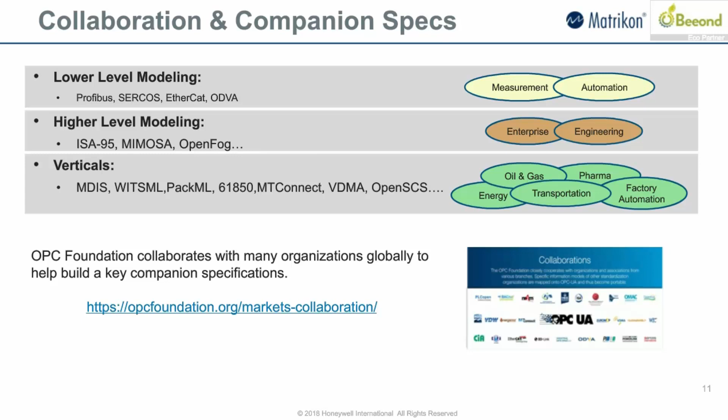Now, that's all I'm going to say about these companion specifications, which, again, now you know are basically various information models that would be accepted or used by various organizations that have a common requirement or need to use them for. So that's sort of the overview of how information modeling ties in.

Now let's go and take a look at the actual information modeling itself, how to visualize and how to understand what information modeling is about. So the easiest way to do this, I thought, would be to just take a look at a physical asset. So let's say you've got a robot and it's got various points. I just added some, those crosshairs are little data points that you might be looking at on the robot, say a welding robot. So this is what you would have as a physical asset.

Now in today's lingo, especially if you're dealing with Industry 4.0, but also in the Industrial Internet of Things, we talk about cyber-physical systems, right? So that basically means that you've got a physical asset that is properly modeled and represented in cyberspace, because in the end, it's the interaction of the various information models in cyberspace, or on the digital side of things, where their data and the services that they provide, all those interactions happen there, and the physical assets then execute on that.

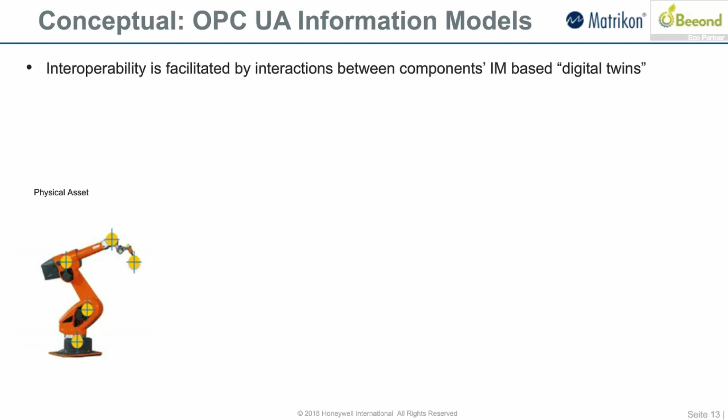So in that sense, we would call the information model and all the information associated with that information model for a given physical asset, when you bring those together, so the data relationships, the services that act on them, and all the data, I show them in two different boxes above and below. If you bring all those together, that's really what you would call the digital twin, right? So just for ease of reference, that's what I'm talking about when I refer to something as a digital twin. It's the cyber representation of the capabilities and states of a particular system.

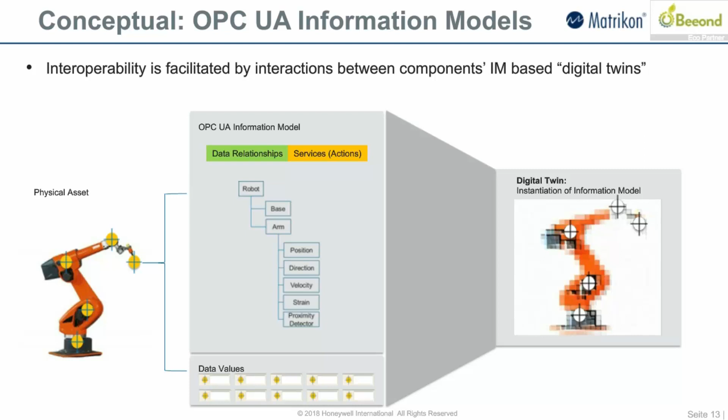So now when we shift over to how implementation of this would work, what we find is that, number one, you've got this robot, and of course it's got processors and all sorts of subsystems within it to operate all the components and keep diagnostics running and such. So you are going to have a model and a relationship between the various components, and those include some actions that it can perform that could be exposed, and also the actual readouts, either read or write points on it.

So basically, if you're creating an OPC UA server, which sits at the heart of this interface, what makes a digital twin accessible or visible to the outside world would be through an OPC UA server. So in this case, Matrikon provides an OPC UA SDK for building the OPC UA servers and clients. So what you would do is you would code both the interaction with the data, the reads and writes, interfacing with the physical system, and the information model, and you would implement that via the Flex into an OPC UA server.

So this now creates your gateway or entry into this cyber-physical world. That's how the world interacts with your physical asset, through this OPC UA server. However, given the complexity and how much you have to work with the models, there's a lot that has to get done there, because the more components you have and the more services that are exposed, the more you have to work with that and make revisions and such. One convenient thing that you can do is to use a modeler.

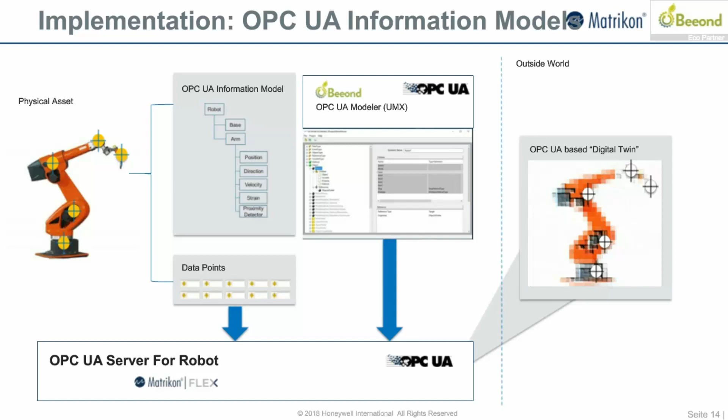So we're going to get into the practical side of the demonstration, which is basically a replica of the scenario that Derek just went through, in which we are going to model this fictitious robot in the modeling tool, and then we will see how the implementation of a demo server, which is done with the Matrikon Flex SDK, can just take that modeling definition and use it to instantiate the actual objects and methods and characteristics of the specific definition, which is a robot.

And then we'll do a small experiment. We will change that information model configuration in some way. We just create another instance, and just by saving the new model, the server will not need to be recompiled or anything. It will just get the definition and will present that new information into the address space to the clients, which in the meanwhile will not need to disconnect or restart.

So I'm going to share my screen, and there's going to be a little bit of code and tools. I'm showing now on the screen the rather simple interface of the UA Model Accelerator, which is now publicly available on GitHub. You will find the information in the resource list or in the information about this webinar.

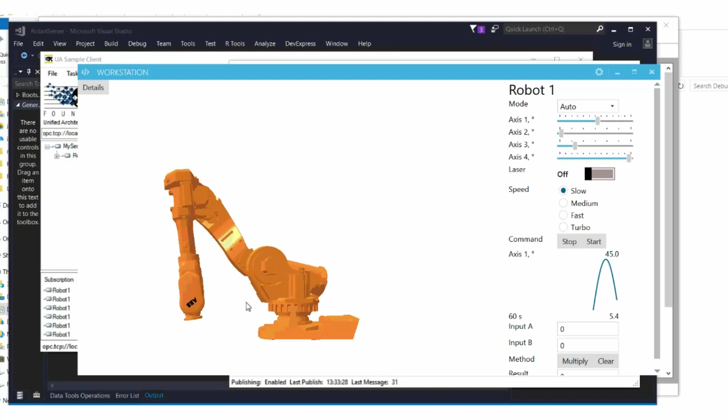Now, this client in particular is aware of that information model. It knows it's going to connect to a robot, as opposed to the demo client from the OPC Foundation that can connect to anything and you just see the values. So this graphical animation is tied to that server in a way that it knows to discover robot 1, and it animates accordingly. So it moves with that server.

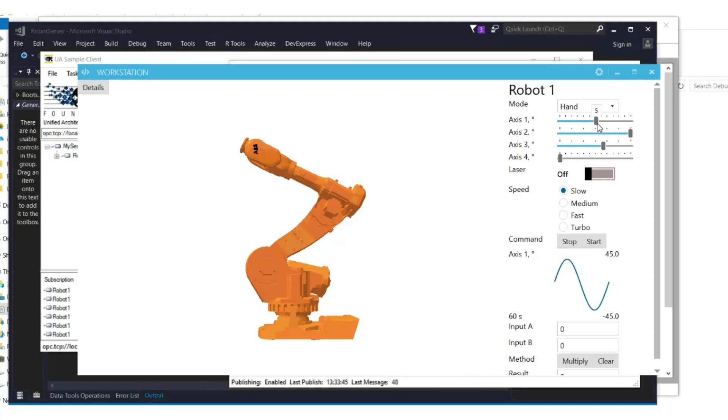What that means is, for example, I can turn this in manual mode as a client, and I can change the value of axis 1 to minus 120.2, and I can immediately see that change in the other client connector. This is the classical OPC UA expected behavior.

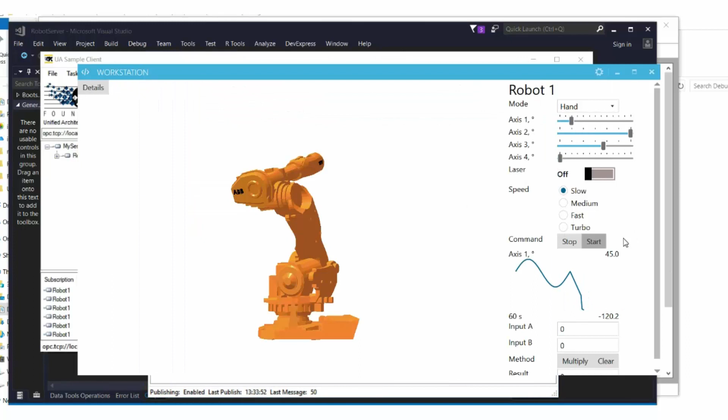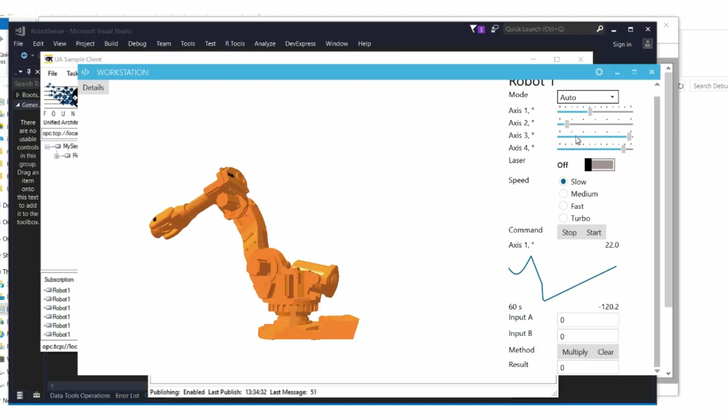Similarly, I can call a method here; the server is going to allow me to multiply two values, and I can stop and start. I can change the speed and everything you can expect this thing to do. The simulation that runs on the server side just applies a sinusoid to the axis, allowing this to move.

Now, as a modeler, I might have the need at some point to change my information model, and I want to do so in the tool, for example, just instantiating a new robot. That's an easy thing to do. So I create robot 2, and let me just see if the screen is refreshing. For robot 2, I just select the robot type as a definition as per my information model, and that will bring in all the characteristics of the robot.

So having that means that once I save this, I can probably load that into my server. One other thing that I would do, in order to keep everything tidy, is organize my robot using the referencing capabilities of the UA information model. What I'm doing here is I add the ability of this model to be grouped under a folder.

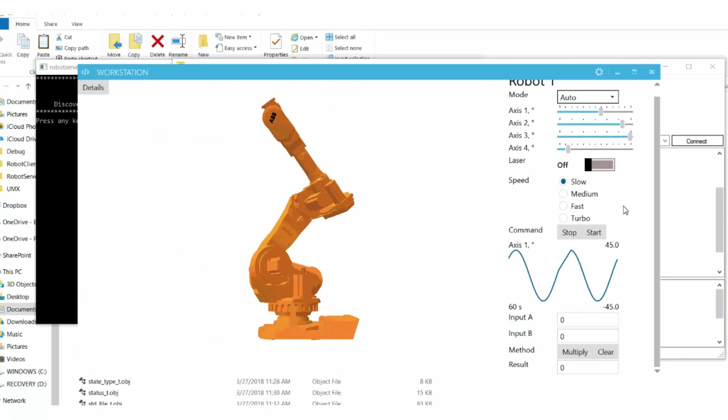And there it is. It does that automatically, and now you see that you can see two robots. Of course, my animation client has reestablished connection with robot 1. Of course, this client is specifically designed to connect to that robot 1, so the fact that you added another robot doesn't affect this client particularly.

But you can see where your modeling capability allows you to change the information model. And I did something rather simple. I just added a new instance. But I could also put a new version of a type definition, a new standard in place.

In OPC UA information modeling, I can also implement more than one information model in one aggregated address space and take advantage of the many standards that are available in OPC UA companion specifications to actually create my own enterprise standard that uses ISA 95, MTConnect, PLCopen. So that's the power of the OPC UA information models, that they can be easily aggregated.

So that's basically the end of the demo. As I said, this code is going to be available on GitHub. The modeling tool is already on GitHub, available for people to use. In our site, we have the binaries for people to play. Of course, it's an open source project, and we are going to welcome people using and testing and giving feedback. It's one good way to actually get comfortable with the specification.

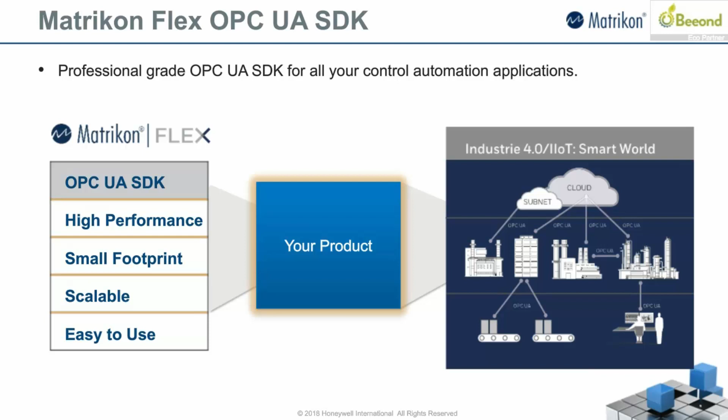Now, as far as next steps are concerned, the key thing to pull away from here is when we're talking about what Beeond can do for you. They actually have an excellent program that's put together for giving you the 5 steps for how to go about OPC UA adoption, right? So kind of a structured approach to doing this. So the UA standard is already structured on how you work with the data and define relationships and such.

But then the question is, what's your process? How do you go about actually preparing your development team to be familiar and comfortable with working with it? And then how do you, as quickly as possible, actually get your product out the door, which means you're trying to shorten the development cycles and such. So that's something that Matrikon really sees value in for what Beeond is doing, and hence part of our partnering.